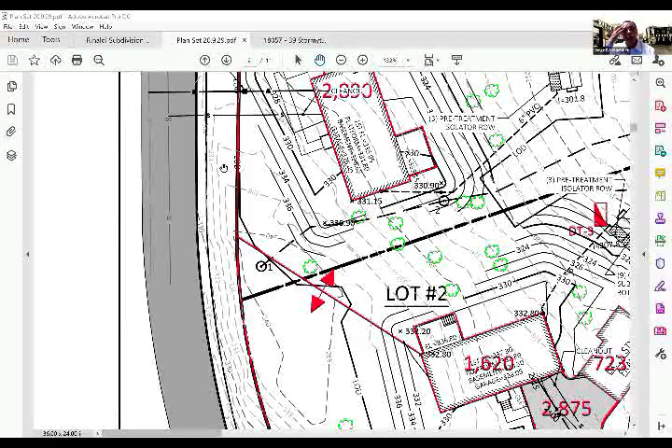Yeah, okay. So this is where we're talking about our concern in installing a sidewalk along Stormytown. Can you see my cursor along here? Yes. Okay, so we have an elevation change—about 340 elevation at the right-of-way here, and then we go down to elevation 328. This is all within the right-of-way of the road of Stormytown.

So putting this sidewalk in and keeping it a safe distance back, we'd be taking this slope down approximately 12 feet. Logistically, number one, closing down Stormytown, but just that mass of earth moved to put in the 4-foot sidewalk would be a large undertaking.

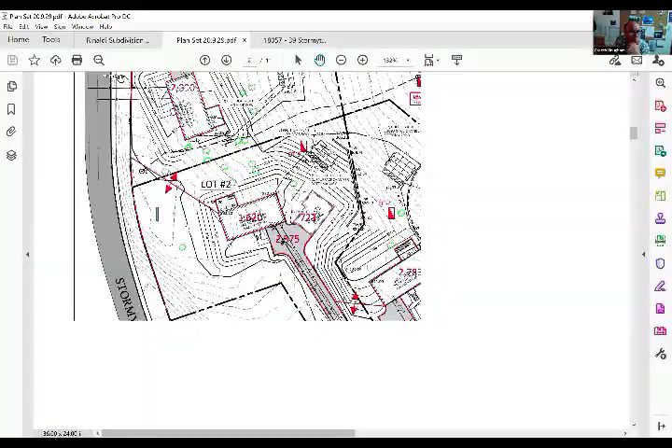I'm not sure if I have enough of the screen shared to show that grading change. Yeah, it's pretty clear—I see that it's a lot of material. The rest of it is okay because we're pretty flat along Stormytown here, and as we get up towards the stop sign it gets flat. But we've got this knoll here that is significant—it's a 12-foot grade change.

To cut it back, we'd be really hampering lot 1, reducing that usable yard. Lot 2's got some room here since we're coming off the new cul-de-sac, but forgetting lot geometry, my concern when we really studied this is that significant cut for the benefit of that 4-foot sidewalk—that's why I came full circle.

So if it's rock as opposed to soil, you could end up with a sheer wall of almost 10 feet in places, right? Yeah, we could—it would be a sheer, there would be some cant to it, but it would be. We wouldn't have to go into the lots, I guess, to get that slope cut back.

Right, yep. I wouldn't give up on it if it's not a tremendous financial burden. Could you use that blasted material anywhere? Well, I don't think the owner would, but I don't think we'd propose to blast given the proximity of existing houses nearby. Oh, okay, just chop it away. Yeah, it would be chipped away, and given the width of Stormytown Road, you wouldn't be able to do that from the top with proper protection along that shoulder.

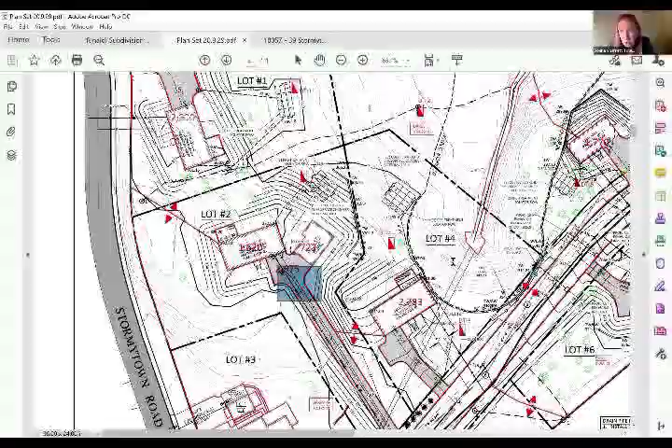I like that idea, can we explore that if it was less work and less impact? Just to see if it would be less impact for earth removal. Because my concern is, with all that removal, if it wasn't all rock and it was earth, you might have to build a wall or some kind of supporting material. Right now it's unknown, but if there was a way to do a crosswalk and go to the other side, that'd be great because that would still achieve the goal.

Yeah, I'd be happy to talk with the owners and also look at that geometry and see what that would be, if that's an option.

Might I also suggest that we get an opinion from the town as to what side of Stormytown Road they would best see fit to have sidewalks installed? Maybe from the town highway supervisor, just to get their thoughts on the matter. I think that's a good idea, Valerie.

Okay, Don, you wanted to say something? The owner wanted to say something? I don't know if it's possible to unmute Donna Chick. Can anybody hear me? I can hear you.

Okay, what are the options for having a more narrow sidewalk? Would that help alleviate some of your issues in terms of that particular location, other than putting the sidewalk on the opposite side of the road? Yeah, no, because the slope starts basically within a couple of feet of the edge of pavement. You can see these contours are really close together and they go right up to the edge of pavement, which is the shaded area.

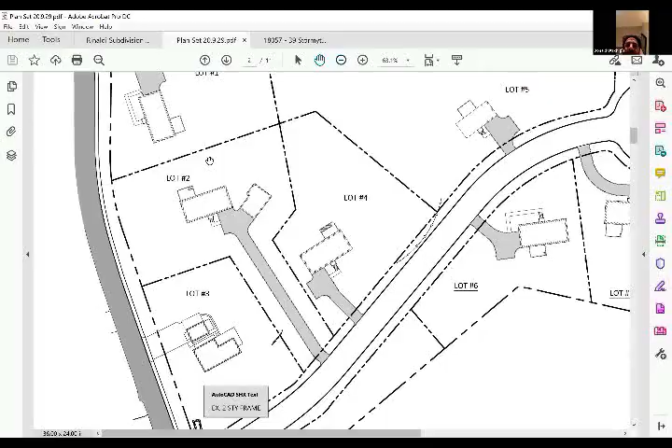Sure. Okay, so I had spoken with Paul with Fusion and JB a little earlier this evening. We're not opposed to putting a sidewalk in. Obviously, if we were going to put a sidewalk in, we would like to put it in the development, in the cul-de-sac, along Stormytown on the side of the cul-de-sac.

If there is rock, which is a good chance it will be, it will take a lot of time. It'll be relatively difficult to protect the traffic and pedestrians outside from hammering rock. We can do it, obviously.

And we also discussed putting it on the other side of the road. One of the concerns is the other side of the road, we would be impacting neighbors on that side by doing that. So we're not against putting a sidewalk in, or the financial cost that it would be.

One of the recommendations I made with Paul and JB is we would rather deposit the cost of that sidewalk, a reasonable cost, to the town of Ossining, so that you guys can continue existing sidewalks somewhere more feasible, which would be more beneficial for current residents of the town along with the town itself. Because right now, if we put a sidewalk that goes nowhere and ends nowhere for an undetermined period of time, but if there's a section of the town that could use it to continue an existing sidewalk or repair a sidewalk that's necessary, as an applicant we don't have a problem depositing the money into the town, the cost to do that sidewalk.

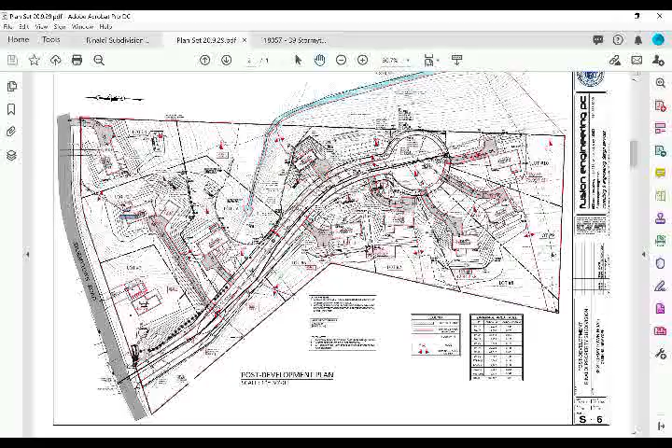That's not a problem, Dan. We can advance that grading—we've looked at that, we're proposing a cantilever retaining wall in that location. In terms of the stone footing and facing, it's a tricky proposition depending on how high the wall is with a footing design like that.

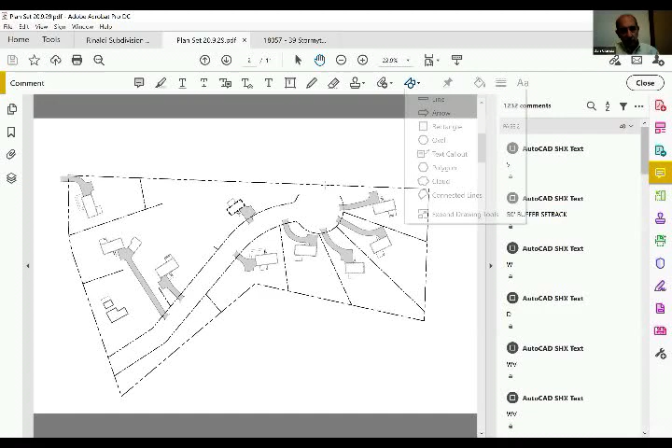Perhaps at the site plan we can just put a note reinforcing that a building permit will be required for that structure. It's going to be in the right of way dedicated to the town, so ultimately we'll be responsible for it. But I just want to make sure we're on the same page with how the grades between the cul-de-sac and retaining wall will be treated.

Yeah, that the plat will also show. Merritt's is preparing the plat for us. We're putting, just as a note, as this gets prepared...

That will also bring us to the application for the water main extension from the health department. We're putting the drainage that's in lot 5 in an easement dedicated to the town. That's dealing with the stormwater from the road, as well as this bioretention basin between the right of way of the cul-de-sac and the drainage. That'll also be within an easement, and it'll be shown on the plat.

And of course, the final location of where the sidewalk goes to. Although if it's off the property, I guess the sidewalk would just be part of the site plan, not part of the plat.

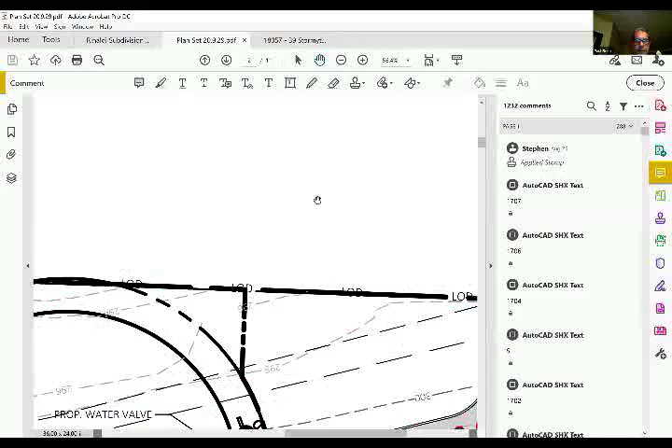But yeah, we can make those notes on the site plan for that retaining wall here too, and we've got the overlay done for the drainage and the slopes. We're kind of limited to where things are going, but I think we've got a solution that can mitigate our runoff to the pre-development rate.

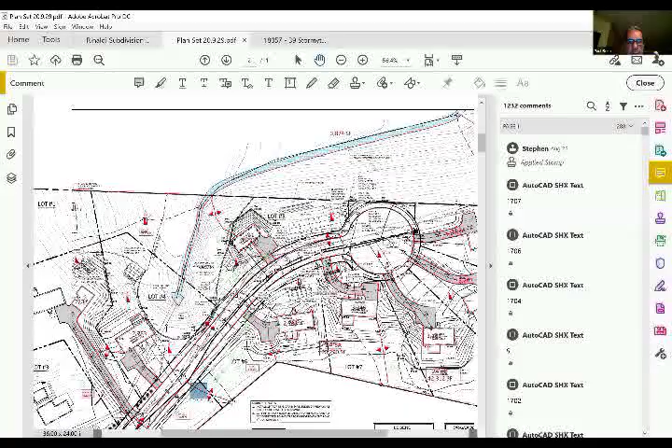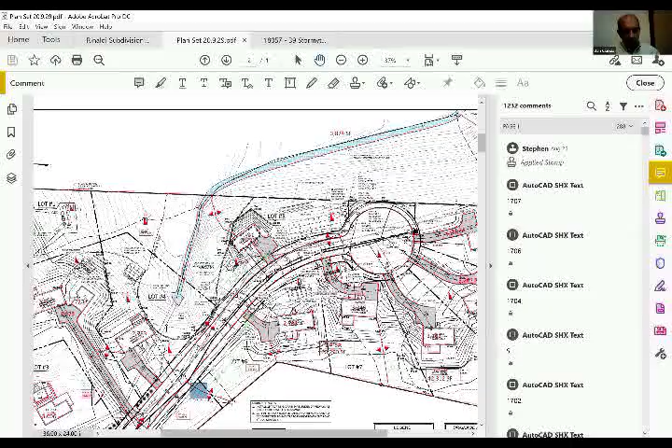All right, and the final note, again, was a coordination issue that the rain garden detail shown on JB's plan looks different than the rain garden shown on the engineering set. So the drawings have to be coordinated, or one drawing governs what it's going to be.

Yeah, well, JB and I will handle that. We'll probably end up merging these into one set. All right, so we've got to do a final review of the latest things, but if something else is forthcoming - this quick scan, I saw a couple other things on the plans we got today that need to be adjusted. So I'll be in touch with you on that.

Yeah, thanks, Dan. Hey, it sounds like the applicant's got a lot of work to do ahead with this. Are there members of the public present for this matter?

Yes. Who wish to speak? No.

I have some comments too, so maybe after. Yeah, I just wanted to make sure that the public hasn't run off on us. Yeah, no, they haven't. Okay.

So, board members, any comments at this time? Donna? Yeah, I have a few. So first, I don't think I ever said, but I definitely would - I'm definitely in favor of waiving the streetlights. So I just wanted to make that official. And I look forward to the further discussion of the sidewalk.

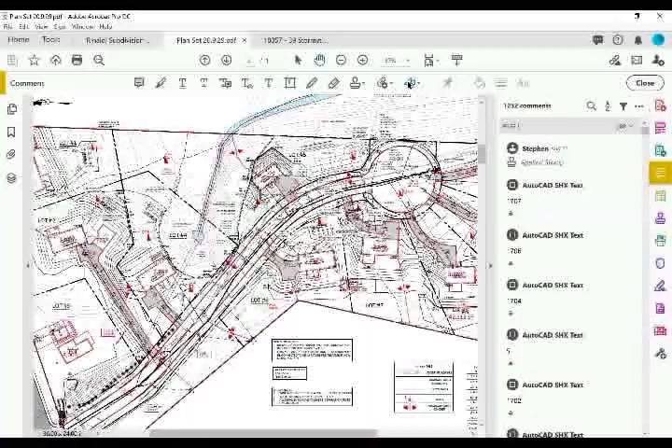So I had brought up last time my concern about the road being right next to such steep slopes. I was wondering, I had asked for the stone wall to be extended and another one added. If that doesn't look like it's been addressed, I was wondering if this could be referred to Pete Connolly and the Highway Department Supervisor, and Paul Ferroli or whoever would be looking at road situations, because I think there's going to have to be a guardrail or something. You can't just have a road right next to a cliff. Maybe John Hamilton too, I don't know, but I'd definitely want them or someone to look at that as a safety issue, because one icy night with a driver going off the road down that cliff would be really bad. I don't see that - did they add a guardrail there?

Is that what that red line is? Yeah, I was just highlighting this location - I think that's where we were talking about last meeting. We noted that here. Okay, so are you going to put a guardrail or a wall or what? We were proposing a guide rail. Okay, and then also continuing around the cul-de-sac? So would that be - I see you have a guardrail, would you just continue that around? It just seems like it needs to be a lot longer than it is.

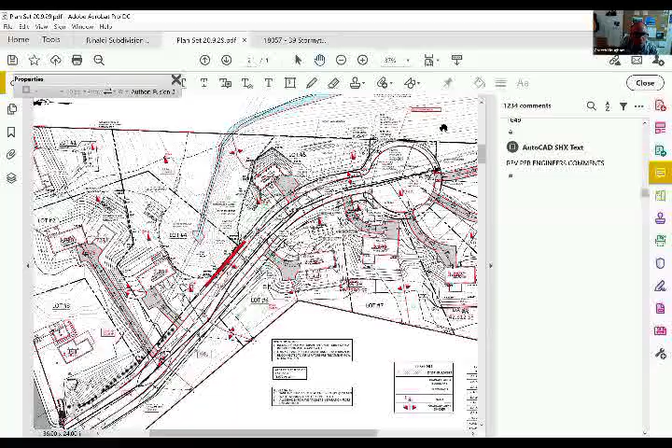So whatever, I don't know if there's any... we would just propose a natural stone, but we didn't, JB. I'm hopeful not talking for you, but I don't think we proposed any samples yet. Just to remind you, very early in the process, you agreed to make it natural stone, not any artificial stone material.

Yeah, so thank you, Gary. I wanted to mention that during the preliminary presentation, we did show, I can bring that back, we did show the board type of stone that was agreed upon. Okay, we knew that. That was probably before I was here, so that's why I didn't know.

Yeah, okay. So I have two other things. One is that I don't know why I didn't notice it before, but you have 300 feet of the stream culverted on the property, and then you're putting a rain garden right next to where there's a culverted stream. So it just seems like, why wouldn't you just daylight the stream instead of building a rain garden right next to a culverted stream? Why wouldn't it just be a daylight of that part of the stream?

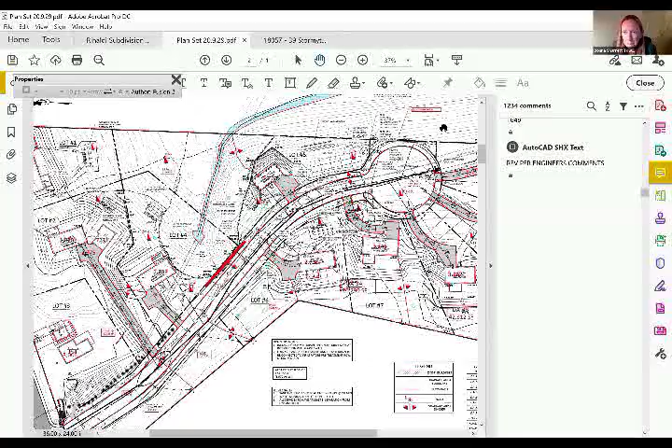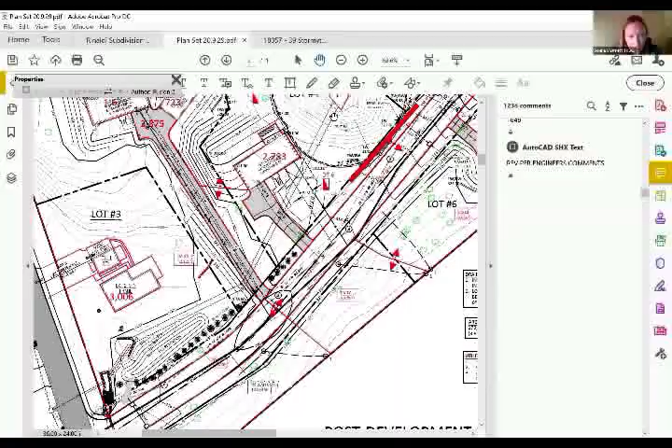Yeah, the whole line, the whole line at the ends, it goes all the way down. It's quite a... I'm just surprised anybody ever did that, that they put the culvert all the way down that slope. Yeah, that's all. This is the culvert that you're talking about. Right, and it daylights over here. Yeah, yep, it's like 300 feet.

So do you have any idea why that was done, that they put the culvert all the way down that slope? I just think, but my bigger point, I'm just baffled by the whole thing, but then putting a rain garden right next to a culverted stream, which the stream would naturally do what a rain garden does, right? Am I missing something? I don't know, maybe I'm missing something.

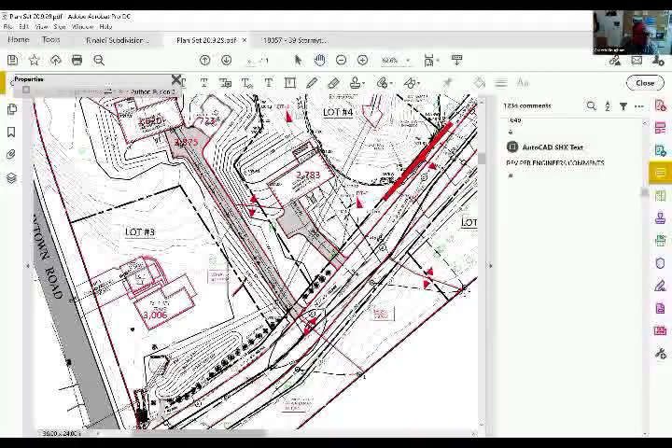No, good point, Donna. We had actually talked about that culverted stream being daylighted very early on, but it got overridden for some reason. I don't quite remember what, but yeah, I agree with Donna's point entirely. It does seem silly to have the bioswale right next to that. They're working at cross purposes almost.

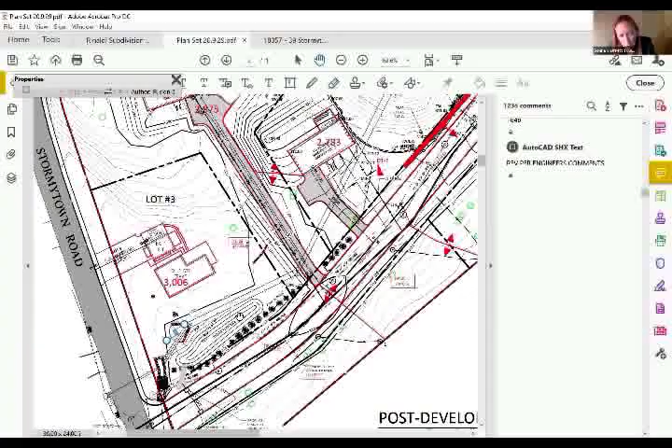So just to clarify though, is the rain garden, what is the intent? What water are you intending to go into the rain garden? Is it that the water that comes out of the culvert by Stormytown Road overflows, or are you looking to guide water from the new roadway that you're building? What are you looking to achieve with the rain garden?

I just messed up the line, but do you see these arrows here? Yes. This is the high point of the cul-de-sac, so the cul-de-sac slopes down from this high point and then comes this way. Right, so we were just treating the water quality portion of this roadway by putting in a bioretention and then letting it discharge directly into this open swale. It was a natural place for the water to collect here in these cul-de-sacs, go into a bioretention facility for water quality, and then discharge it directly to the adjacent stream.

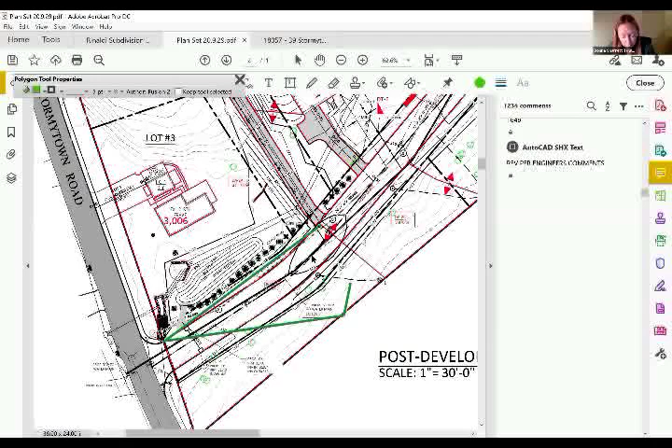Right, right. So, yeah, I'm just so opposed to culverted streams, and I've been to so many places where they've daylighted them. It's a thing that people are doing now because they realize the importance of the stream. To culvert 300 feet of the stream, I would imagine that when that was done, somebody downstream must have experienced some difficulties, because it's a tremendous length of stream to take out of production. So I guess if it's already been discussed, there's nothing I can do about it, but it's really disappointing. Talk about environmental impact, that's got a lot bigger environmental impact than taking out that rock for the sidewalk.

Yeah, absolutely, yeah. I don't know when that was done, but I'm not sure when that happened. But now, with all the equipment, would be the time that you could reverse that wrong. With the equipment that you'll have on the site for doing this project, it would be like the only time that you could reverse the wrong. So even I can see where you'd want to keep it culverted underneath the driveways and in between the two driveways, but I don't understand why it would be culverted going down the slope and here. Yeah.

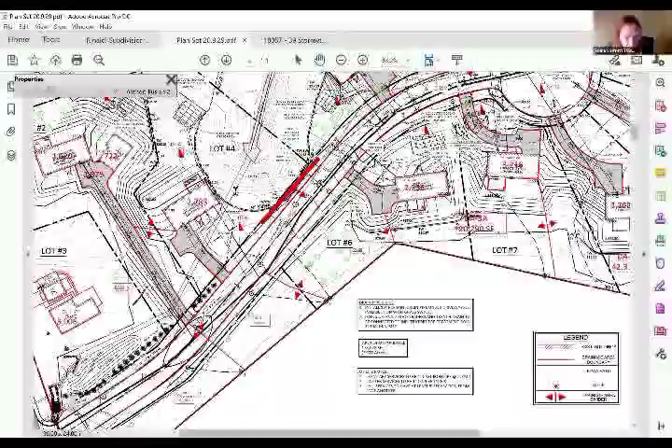It's just so strange that was done. A lot of things in the past have been done that are so crazy, and we're living with all those things. But yeah, you've got a pretty significant slope here. I don't know the reason why it was done, but you've got a pretty significant grade change here from here to where it daylights. But I hear you.

All right, so I'll leave that if anyone else wants to comment. But my last point, I would definitely like to see the plant list for the rain garden. I don't understand why we wouldn't see an actual plant list for that. If you are going to do the rain garden right next to the culverted stream, I would like to see that.

I would have to say I've never heard of a rain garden that didn't take much longer than 2 years to get established, so I would say 5 years would be what it should be. And then you're saying it's going to be an easement. Does that mean it becomes the town's problem for upkeeping it?

It's receiving the discharge, the runoff from the road. So who's going to be maintaining it in theory? The town, right? So that's not happening, just telling you now. They're having a hard time keeping the parks up, limited staff. I don't know how they'll ever staff that.

So I just don't even see the point of putting a rain garden in. I really don't, because it's just going to be a wasted effort. They're really hard to maintain when someone is maintaining them, and to have it without maintenance is going to be really difficult, and there's just no staff. I don't see flush times ahead for the town, so I don't know how they're going to get more staff to do that.

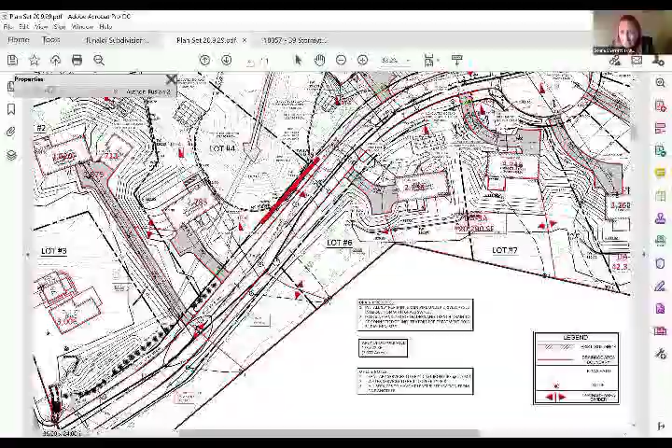We live in an area that still has remnants of a deciduous hardwood forest, and developers keep coming in and taking out the deciduous trees and putting in evergreens, and it's dramatically changing the environment. In this case it's not going to look natural. Also, when I looked on GIS, there's already a deciduous canopy of trees down there. I don't know how you would plant evergreens underneath the canopy of a deciduous tree.

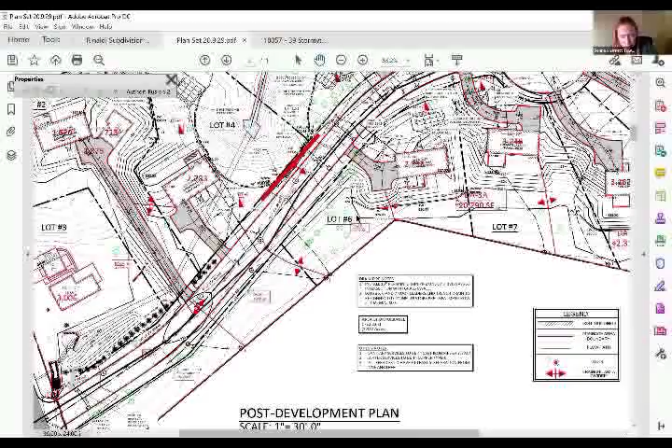So I really object to those evergreens. If you wanted to put a few in, fine, but I counted them up - on this project you're proposing 137 evergreens and 73 deciduous trees. Before, with the pre-existing conditions, the only evergreens were that line of pines someone planted. The trees should be deciduous - this doesn't look natural.

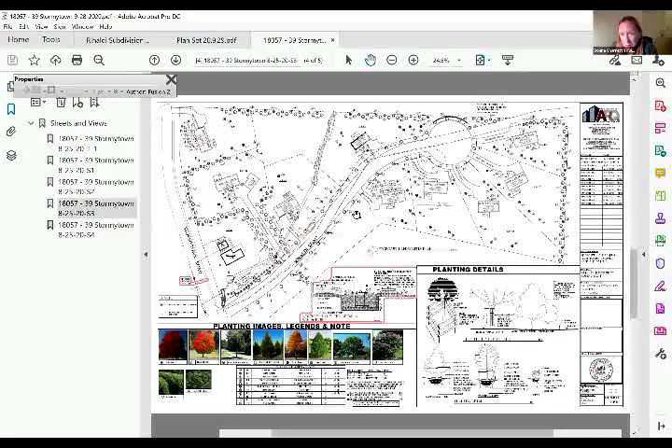Also the trees along Rinaldi Road, you have red cedars - every 30 to 40 feet, a red cedar. It would be far more attractive to have a deciduous tree-lined street. This is what our community looks like. So I would ask if you would consider changing that and maybe diversifying the list a little more so there's not so many of one specific type of tree.

Also, I think Valerie mentioned in her memo something about street trees. It'd be really good to have trees along the road, along the Stormytown Road side - I think that would be more attractive than having just lawns. So, if you could put some of the trees there and not have so many evergreens.

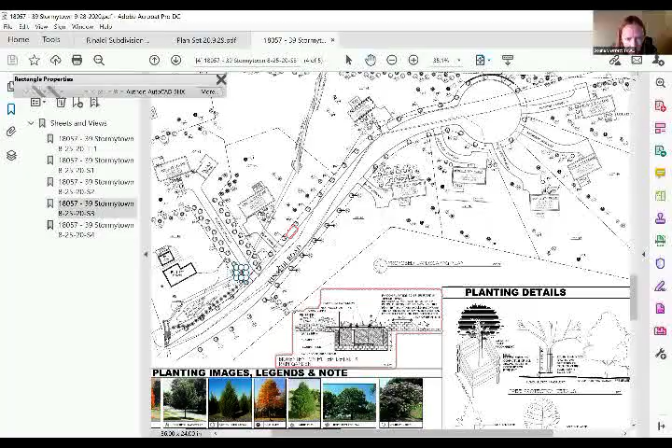And finally, what I brought up last time - I don't understand how the trees are going to be planted on an extremely steep slope. My understanding is you're going to put 4-inch diameter caliper trees. I don't know how you would plant those on an extremely steep slope or water them afterwards, and I didn't get any answers to that.

So I would prefer that the trees be staggered rather than wall-like in a line, and put in flatter portions of the slope where it flattens out a little bit, where the lines aren't so close together. Because unless you can tell me how you're going to put those giant roots into the side of a cliff, I don't know how you're going to do it.

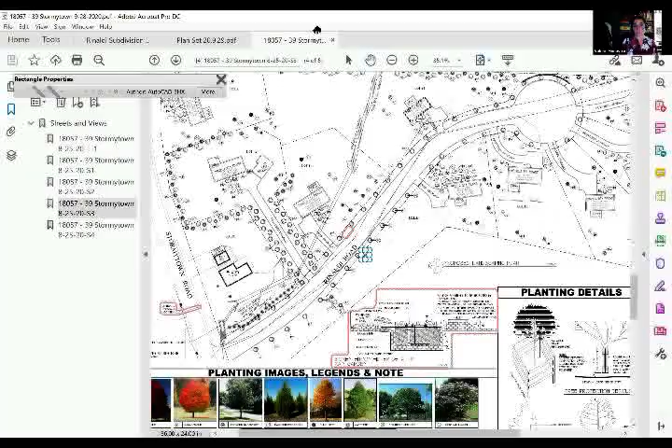Mr. Chairman, these are all really great comments, Donna, and we should definitely look into these. This applicant will be back next planning board meeting, but there is a public hearing tonight. We have three public hearings tonight, so maybe we can take the board's comments at the end, since some members of the public are here to speak on this application. If it's all right with you, Mr. Chairman, maybe we can open that public hearing and go back to the board members afterwards.

I believe Mr. Taliano wanted to speak. Yes, thank you very much.

The club, as you know, is adjacent to the proposed development. Our primary concern is the runoff from that stream - we call it a stream, but sometimes it's a river. We have fields and tennis courts, and on the west side of the tennis courts is that stream, which originates, I guess, up on Stormytown Road. I'm not sure exactly where it starts, but it runs along the west side of our parking lot, fields, and tennis courts.

There are times where this is a raging river, and we are very concerned about washing out our fields and tennis courts. So we just want to be on record voicing our opinion about that, and to ask if we can get a better explanation of how that stream is going to be handled from the end of our property.

Does the applicant want to respond at this time? Yeah, the stormwater has been designed and we're required to mitigate the additional runoff caused by the development, which includes the removal of trees. The design anticipates what the runoff is in the existing condition, which has a certain cover type, and the proposed condition - that's how we model the stormwater system, so the end product doesn't release water at a rate more than what's in the pre-existing condition. So in terms of whatever the stream is doing now, we're compelled to design this and provide enough storage on site so that we're not adding to or creating more water in that stream during a flooding condition or any storm event.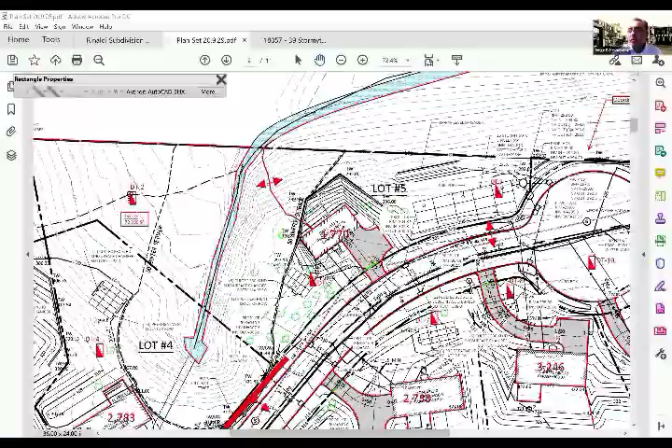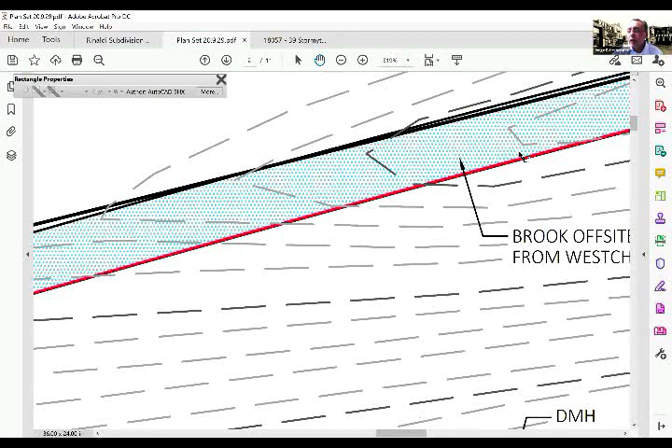I think Paul is sharing the screen. You're looking at landscaping, and there's a wooded area on your side as well. So you'll be looking at a small portion of retaining wall and then landscaping along the wall, along the property. We're not clearing that much of that area along the property line.

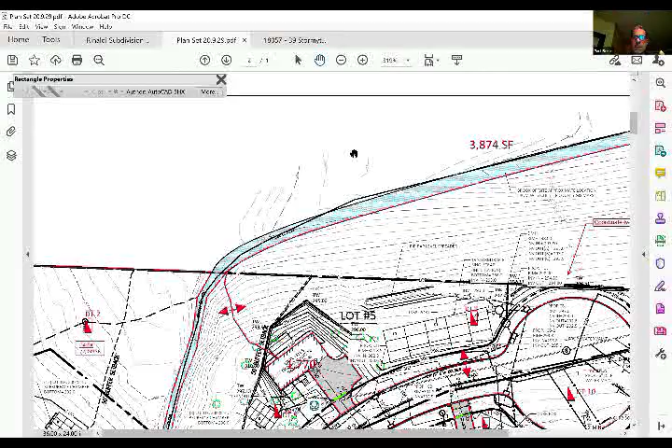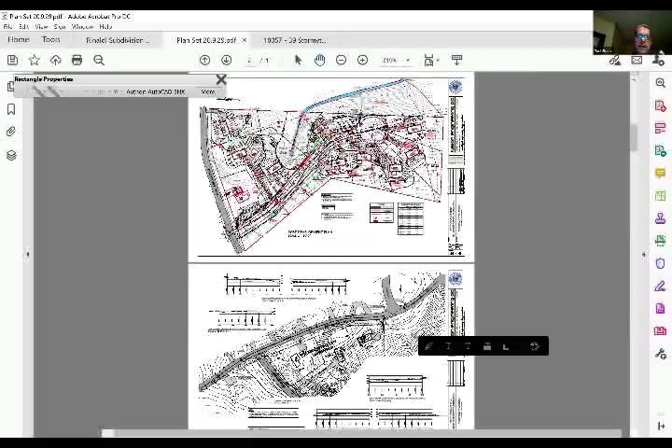Okay, so this is elevation 250 in here, and our cul-de-sac is at elevation 290, I believe. I'm sorry, it's just really slow. But you've got over a 40-foot elevation change from one side to the other. So even, you know, you're not going to see...

Yeah, this is elevation 300. So you've got over a 50-foot elevation change between the two properties at the property line. So you're looking at an existing slope that's not being touched. I haven't done a cross section, but I don't think you're going to see much. I agree, so even the evergreens along the property line, you're not going to see. The retaining wall that we're putting stone in front of for the benefit of Tourview, you're not going to see. But that's what we're proposing.

But your property will be 50 feet higher than our property, so you'll be looking down into our property, basically. Correct. Yeah, okay.

Applicant, we expect to see another submission from you on this, obviously. Yep, and we'll have the plat, which I know is the long-awaited next step. All the other details will kind of be incorporated in that as well, with a new site plan and coordinated drawings between JV and I. Okay, great. Please submit it and give the staff enough time to review it beforehand. Okay, thank you, have a good night.

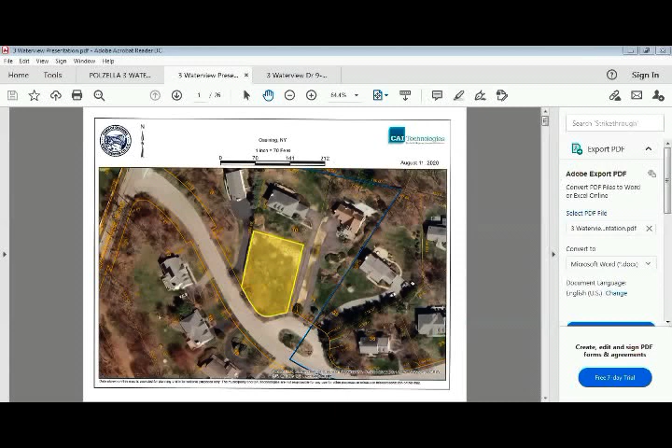I don't know whether it's something we'd have to look at the traffic more carefully for, to see whether any particular mirrors or anything would be adding. But wouldn't that be a matter for the superintendent to handle?

Has that been a continuing issue with us? Dan? That has been a continuing issue we've raised, but it's never really been addressed. And again, I have no objection to the property. It makes perfect sense, and I actually like where the driveway is going to go. I'm just thinking that with another set of cars coming out of there, it's only going to aggravate the situation. I would love to see the town focus on that corner to make sure we're safe coming out of there, all of us, including the new buyers.

If the applicant would just take a gander at the issue, to see whether it would be easy for anything near his property to have an effect on that matter. Was that for me, Mr. Chairman? I didn't catch that. Yes, let's say that once again, sorry. Perhaps you want to look at seeing whether there's something you could do to enhance the safety of whoever's the new resident at your location. It can be easily handled, just take a look at it.

Yeah, but Ms. Lopez said our driveway is fine, it's more the island that's the problem. That's not something I could address. That's what I'm saying. Okay, is that correct? Any other questions? I do think it's an issue for the town, not so much for Mr. Polzella. I think the town should look at that again with the addition of the new home. I can raise that issue also with Paul Frioli and Connolly, since we're going to reach out to them anyhow for the other application.

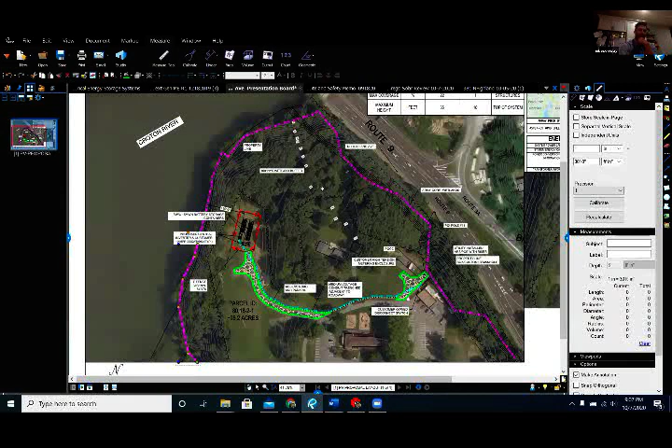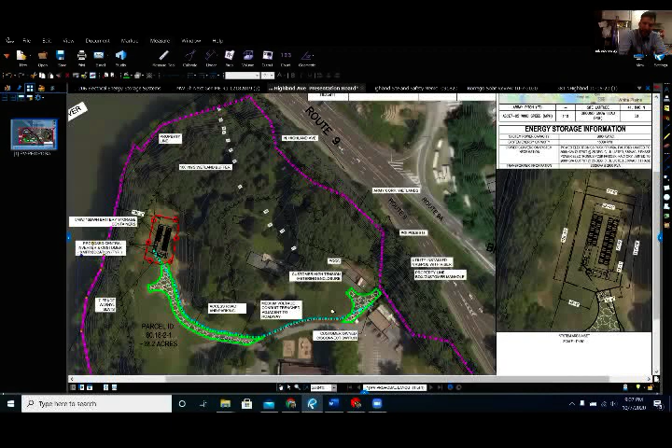I'm from Borrego Solar. We're proposing a battery energy storage system at St. Augustine's Church. The battery energy storage program is a joint effort between Con Edison, the local utility, and the state's energy agencies, most prominently NYSERDA, as part of the Climate Leadership and Community Protection Act (CLCPA), to augment the existing electrical system with a more resilient and carbon-neutral system. This proposed battery system is part and parcel with that plan, one of what we believe will be many systems like it installed across the state. The objective is to reduce stress on Con Ed's system at times of peak demand, which is primarily when the oldest and dirtiest power plants come online. The most immediate objective is to get carbon-neutral resources online to hopefully retire some of the more prominent polluters in the downstate region, particularly with the Indian Point nuclear plant in Peekskill coming offline in the next couple of years.

So what we've got here is about 10,000 square feet, a little bit under a quarter of an acre, in the back of the church, on some vacant land on the northwestern portion of their parcel.

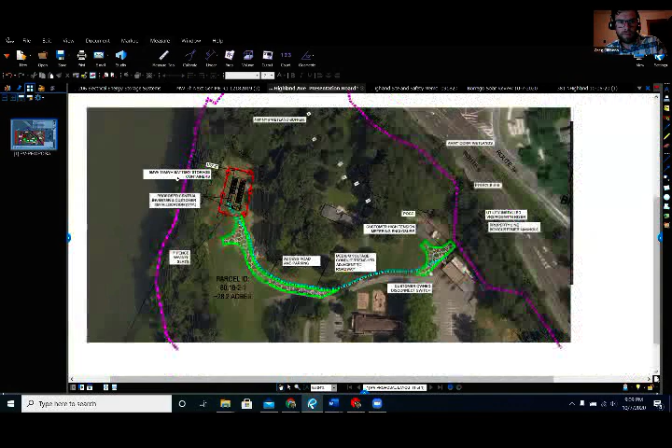The offset to our system is about 100 feet, which was kept per DEC and town requirements. However, there's an elevation change of 60 feet from where our site would be and the river.

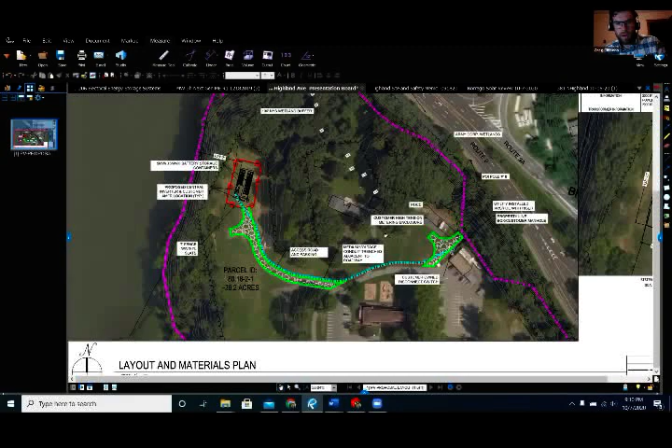The access road will be off of the existing ring road, which runs through the campus. The campus consists of the church, the school, and the rectory, with a ring road running through it. Our access road will be a 20-foot wide gravel access road, capable of handling any of the design loads and vehicles required for it.

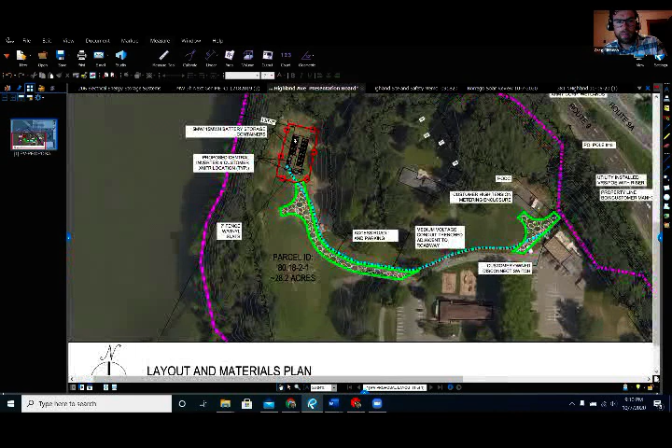There will be a 7-foot fence, denoted in red, surrounding the system. We listed in the plans green slats or vinyl slats, but we can change the color if we need to.

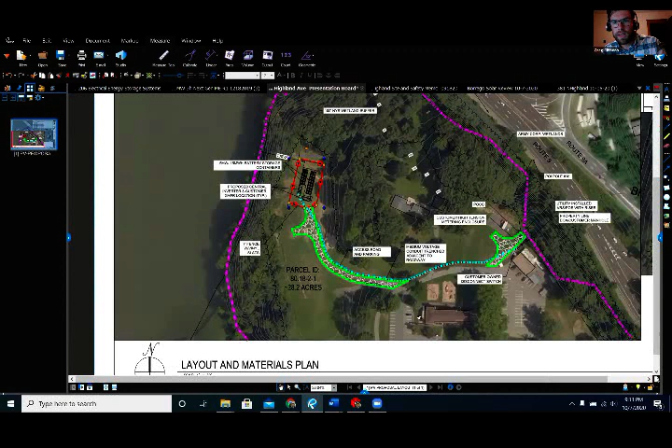The system is very well tucked into the existing site. There won't be any view from any abutters or even from the school, because of the elevation changes and the mature forest around the entire site. You really won't have any visuals even from the St. Augustine's property of the system. I don't think additional landscaping would really help anything—it's really tucked back in.

We aren't actually removing any trees. We're just going on open space that they have that they're not using any longer.

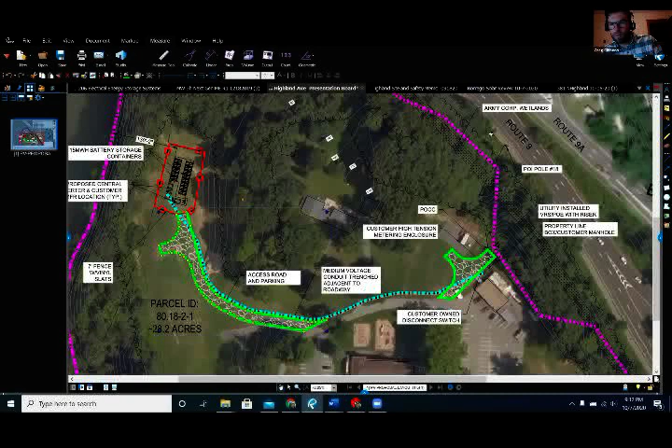There will be a medium voltage trench, denoted in blue, that runs from the system underground along the existing access road, shown in gray, and then over into another stubbed 20-foot wide gravel access road that interconnects right where the entire St. Augustine's property draws power off of the existing route from Route 9. We will also interconnect our power from that location. The system is a grid stack battery storage system.

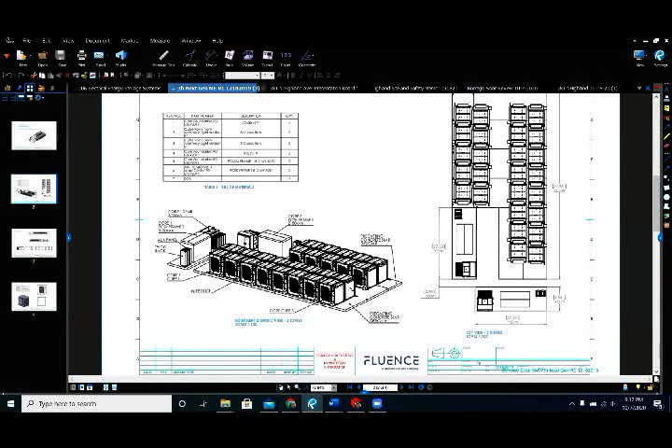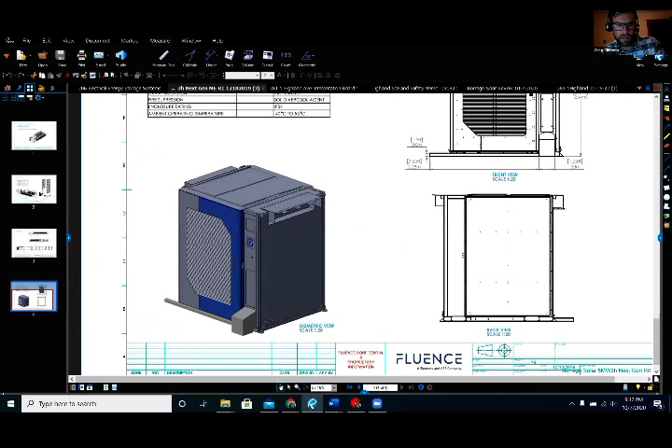I know the planner asked to see some architectural profiles in his review. It's about 8.5 to 9 feet in height, with maybe up to a 1-foot concrete slab foundation. These are individual concrete reinforced steel containers. The batteries are within each container, so each individual battery is separated from another—I'll let Mike talk to that more in a second.

Basically, the system is very well secluded from any outside view or any outside impacts. We do have endangered species on site; however, we should not be impacting any of them. The endangered species is the bald eagle. We won't be clearing any trees, so we shouldn't have any impact to their habitat. The other species identified are all based on the estuary's habitat, which we will not be affecting at all.

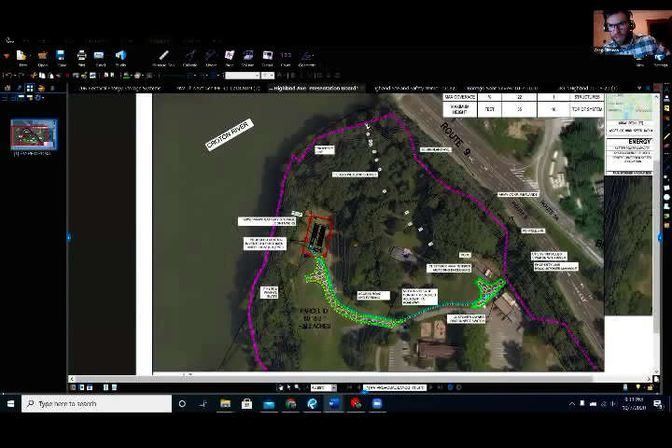There is the wetlands—there are no wetlands identified on site except for the actual river. We do have a spillway that's identified as Army Corps wetlands. However, since this drawing was put together, we have an actual wetland delineation that shows those aren't in fact present there anymore, or they were not delineated as part of our professional delineation.

One other item I'd like to discuss, mentioned by the planner, is a potential variance for the fence. Per the town code, I don't think we should need a variance for a 7-foot fence, even though the town code says 6.5 feet. But that code is specifically referencing fences.

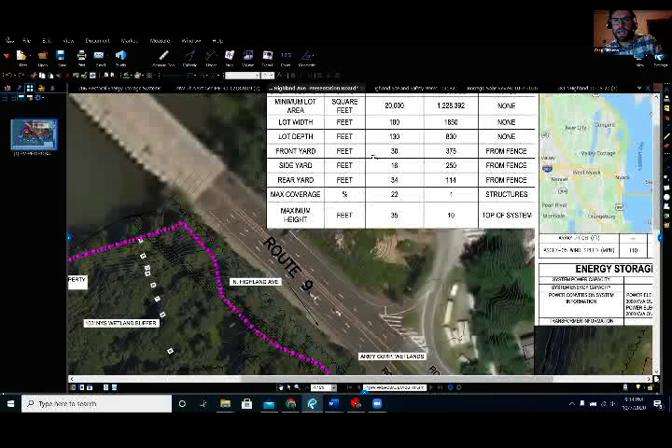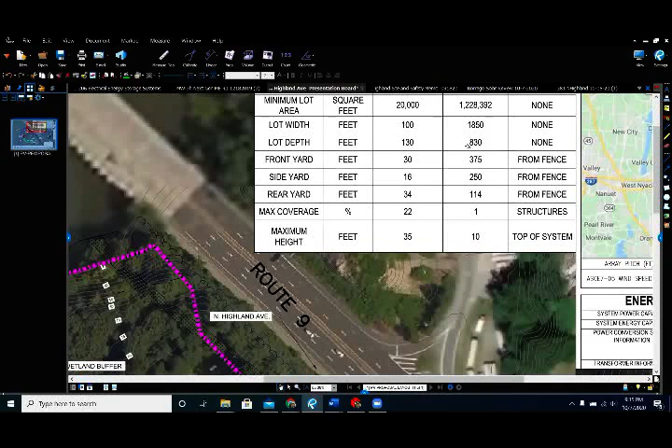Here's the comment: besides a special permit, a height variance of 0.5 feet will be required from the ZBA, since fences or walls over 6.5 feet in height may not be erected in front, rear, or side yards. But per the town code, the front, rear, and side yards specifically apply when adjacent to another property, within the front, rear, and side setbacks—in this case 30, 34, and 16 feet. We have substantially more width from our system to any of those yards, so I don't feel a variance should be required for a 7-foot fence when it's very much in the middle of our site.

I'll let Mike talk a little bit more about the technology and safety that's involved, built into this system. Mike, I'll pass it back to you.

Sure, I'll be brief here, as I expect we'll likely be back in front of this group with fire department and/or first responders to discuss system operation and safety in greater detail in the future. But I'll just briefly say that safety is paramount for these systems, both within the industry ecosystem of vendors and integrators, and within our organization, as safety is a core tenet of our organizational goals. With lithium-ion batteries, safety is extremely important.

These systems are quite sophisticated, and we're continuously monitoring thousands of data points on each battery cell, from operating temperature to voltage, current, and resistance, with high and low set points for each, as well as ambient temperature within their containers, such that parts of the system can be shut down or alarm, with alarms escalated appropriately based on priority.

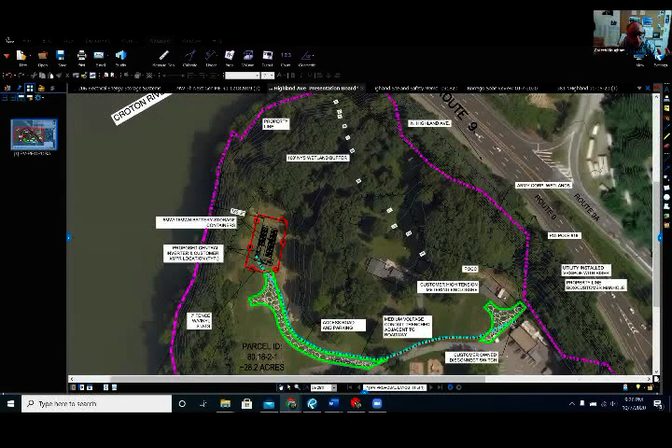I know that area of the Croton River is a nature preserve of some kind. I'm not sure of the details, but it's a natural setting experienced by thousands of canoers and kayakers. So I'm a little concerned about the view of this thing. The 7-foot fence with the green slats can look pretty bad, in all honesty. If there is a view of it, I'd really like to see some very substantial plantings on that west side to block that view. But I think we need to see more to determine whether that is an issue or not.

Secondly, as a point of note, this is right above an area called Frank's Rock, which extends into the river and is a historic site. It's written about in many places—I could show you. Right now it's enjoyed by fishermen and fisherwomen, and I believe they go through this property to get there. That's been a traditional path for those fishing people. I would like to see that not disturbed, if that's possible.

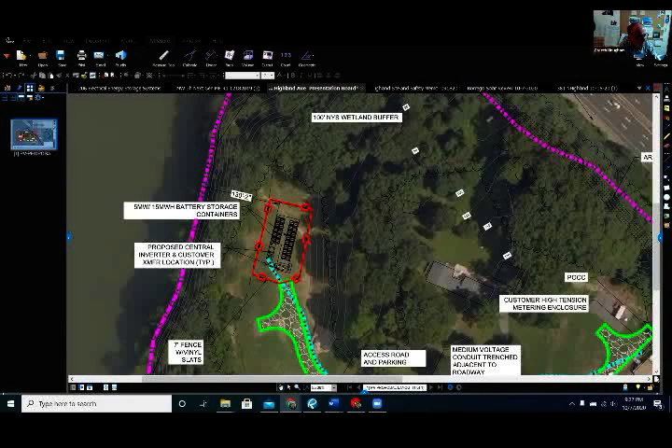And last, I wanted to ask about, there was something, a note I saw that this is a known archaeological area. I know that to be the case. And I wanted to ask when that archaeological survey was going to be done.

Yeah, we have our consultant ready to go. We wanted to just get some initial feedback from the town before we ordered that, but we will start the phase 1B right after this meeting and get that moving.

Great. So I'd like to point out that it should be mentioned in the request to that archaeologist, whoever you hire to do it, that this is adjacent to the so-called Piping Rock area, which was an archaeological site, a very special site where they found stone tools and so forth going back 6,000 years, which is way before most of the Native American civilizations that we normally think of here. So it's a very special site in New York State, Piping Rock, and this is adjacent to it. So I just want to make sure that they are aware of that, so that they can take due consideration of those findings.

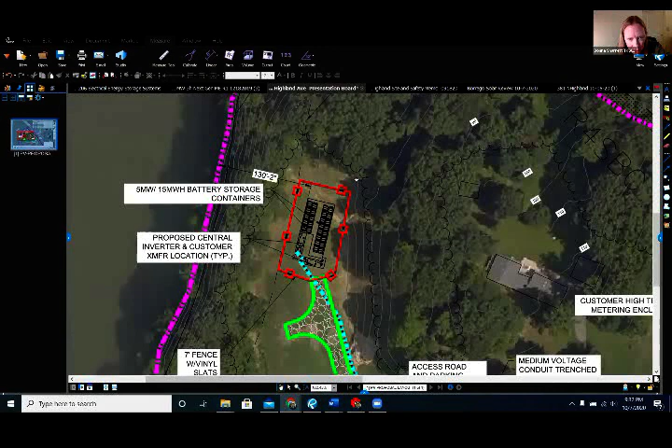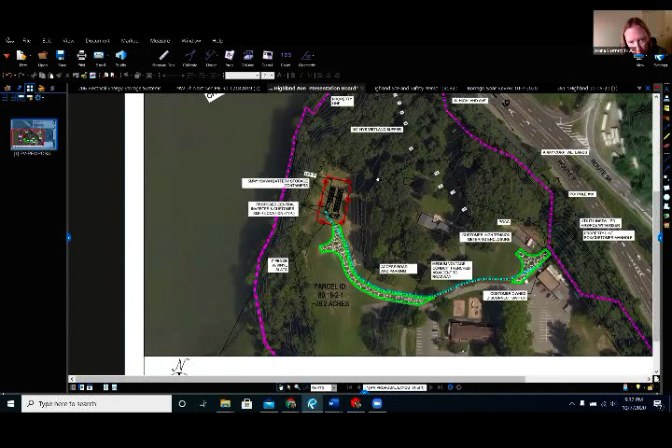Could you put back the thing you had before, where it shows the topography? It shows the topography lines. Yes, yeah, so can you scroll it up so we can see? Bring the image up. Yeah. So it looks to me like where you see parcel ID, where it says 28.2 acres, that the topography there, where you see those inverted V's, indicate that there's a stream at some point, maybe even just ephemeral.

So I was wondering, when you had the soil information, because I was very impressed, all the stuff that you submitted, by the way, all the soil information. Where did you get that information from? Is it just from a general database, or did someone actually go out and do soil samples?

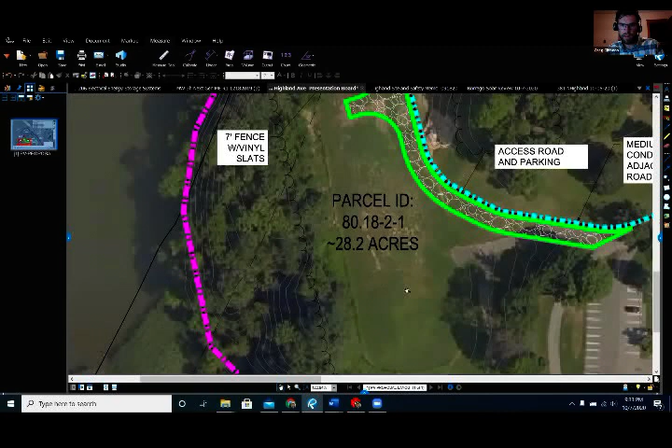Yeah, that would be just from the general GIS soil database. From being on site, I do see what you're showing here, what you're looking at here. It looks like there's probably been some erosion over time where the water that comes off of, this is actually like an old playing field.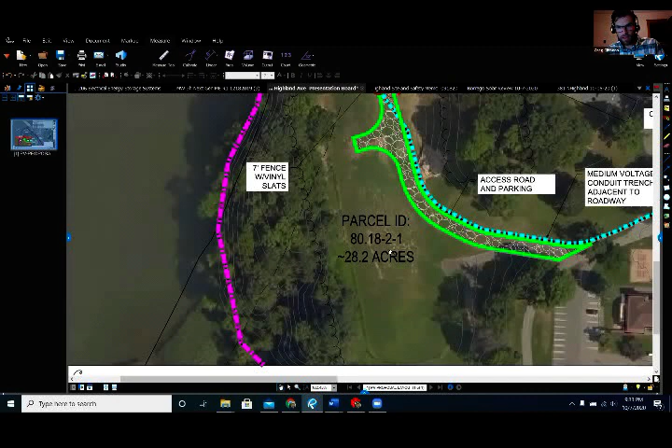So it is very flat, as flat as it shows on the contours here. It seems that water has eroded this portion of the bank away faster than other parts of it. We are in the process of getting a full survey with more detailed topography, so that'll be shown on the next set of plans. There's a big hill on the other side, so it makes sense that the water has to go down somewhere. That's kind of logical.

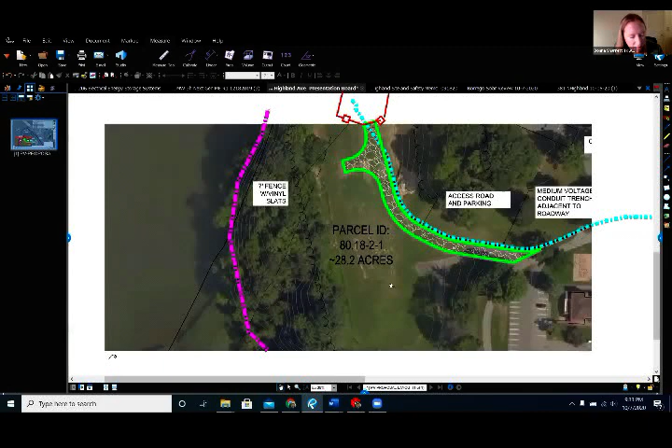So I was wondering, I guess it's a question for Valerie, if we could refer this to the EAC, since there's an issue with a possible stream crossing. It's something that would definitely be handled, but you're putting a road through, so I'd like to know if there's some kind of water crossing at some point, even if it's ephemeral. Can we refer this to the EAC?

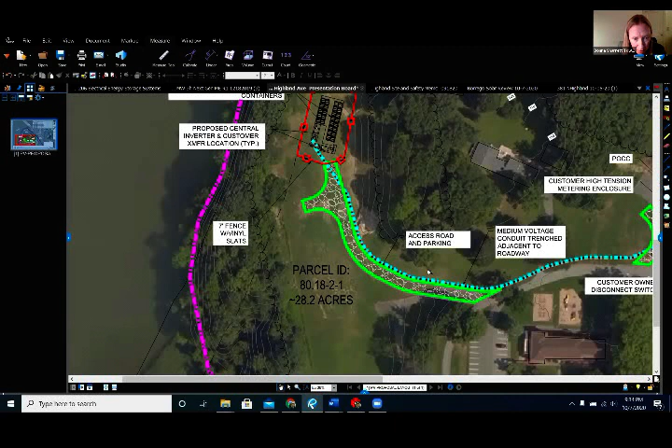Yeah, I'm just looking. There's a stream on the site. It doesn't look like it, but when you look at the topography over by where it says 28.2 acres, if you look down towards the river, there's inverted V's, which is usually a clear indicator that there's water going down, by the river. I don't believe there's a stream on site, but that's up to the board if you want to do a recommendation to the EAC.

Just to have them do a site walk and look at the soil. It's likely that water is coming down the existing road here. You can see that underneath our road, there's inverted V's there as well. This is some existing impervious that comes down, and it probably comes down a bit concentrated during rain events and comes across. But this is, like I said, a playing field.

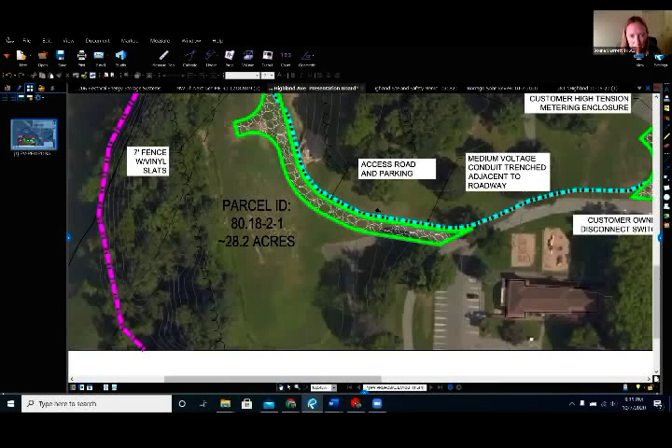There's 100% not any stream or river or anything resembling that on it, because it is level ground. But if water crosses it at some point and you're putting voltage things through, I think it would just be good information to have. The water has to go down somewhere, it's a big slope, so it has to go down somewhere. But Donna, what stream were you thinking might exist if it's a flat playing surface?

Well, it's flat there, and then over by where the church is, there's a big hill. So there is water going somewhere down to the river, and that would indicate that it's there. So at some point, I don't know.

Yeah, we'll provide a much better topography map with our next submission, and we also, as requested by the engineer, will have a SWPPP, which discusses erosion controls and potential stormwater measures required to make sure that nothing else leaves the site than we originally left it before we were proposing this project.

Yeah, my concern is that you'd be crossing through an area that possibly has, during large rain events or something, water coming through there. Which is something certainly you can manage, it's just, I think that should be known.

I'm just asking. Yeah, that's something that we do have a professional wetland delineation report for, and they look for wetlands and streams, they have delineated that, and we will have that confirmed. We've submitted boundary validation and jurisdictional determination to Army Corps and DEC already, and we will have that confirmed with them. Any streams would be identified in that report and confirmed. I'm not saying that we can't do what you're saying, I'm just giving you additional background of what we are going through with this process.

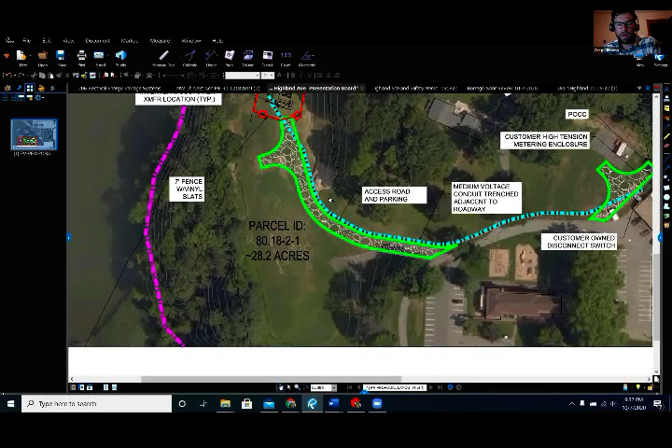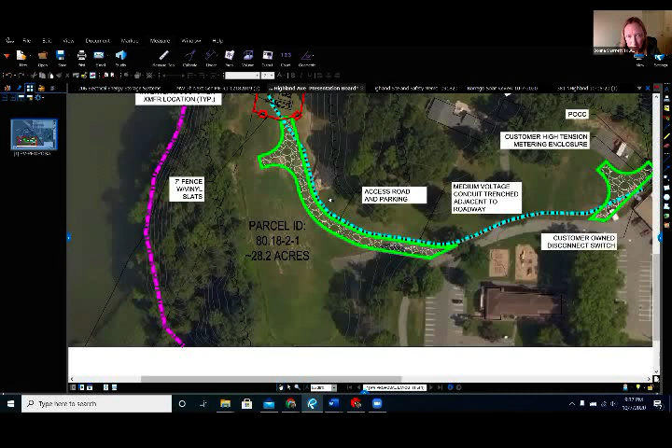So they're actually coming out and surveying? They've done it, yep. I think that delineation was provided with the report with the EAF, I believe. They didn't find anything really on the site, but it's their professional opinion, not our professional opinion. So we do have that included, and then we will get it confirmed with Army Corps and DEC.

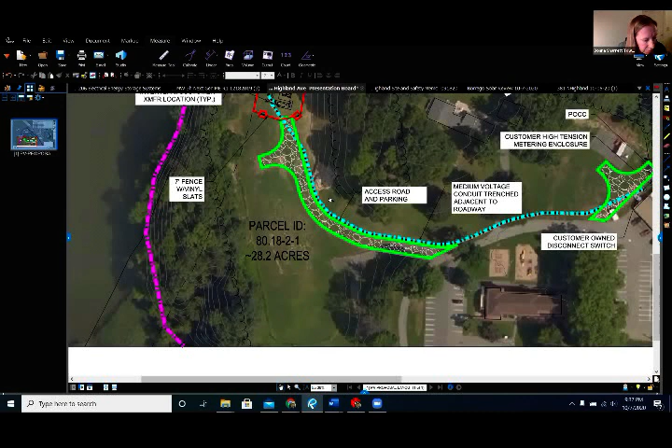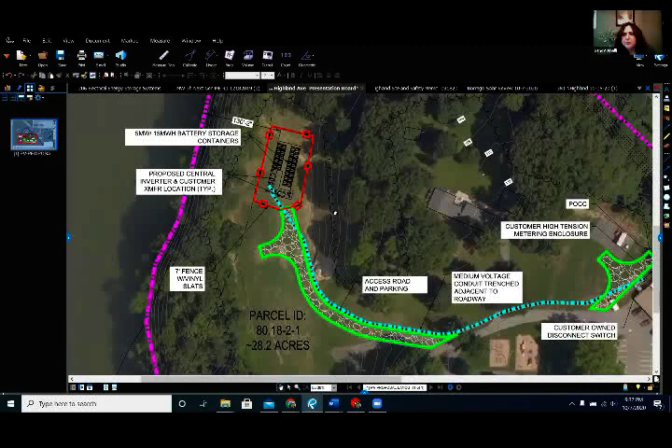Okay, so I would prefer that the EAC looks at it, just because it's the environmental group in the town. But if nobody else wants it, then that's the way it is. I just want to interrupt - Valerie's power went out briefly, so she's trying to sign back on.

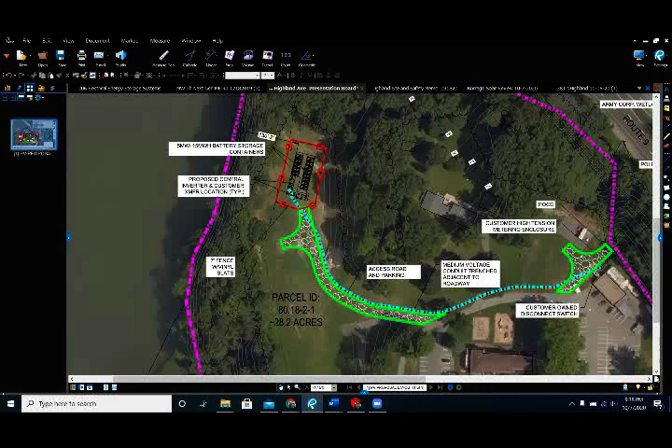Okay, here she is. Mr. Chair, I just don't want you to forget to declare notice of intent to be lead agency and to direct circulation. Right. Yes, why don't we have a motion to that effect? I'll make that motion. Any second?

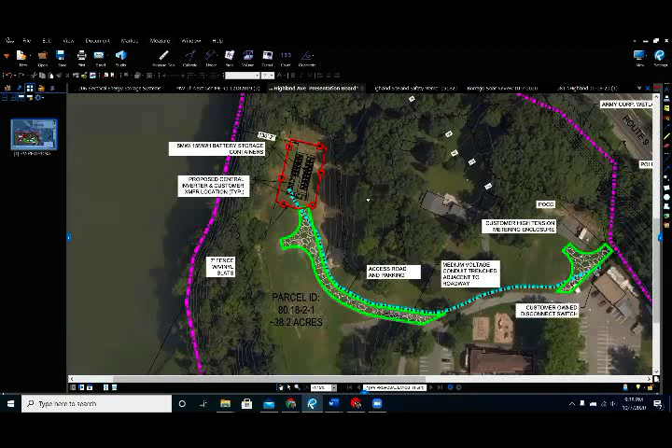I second. Great, okay. Garrett, how do you vote? Aye. All right, I agree as well. Jim? Yes. Donna? Yes. Okay, that would be a majority.

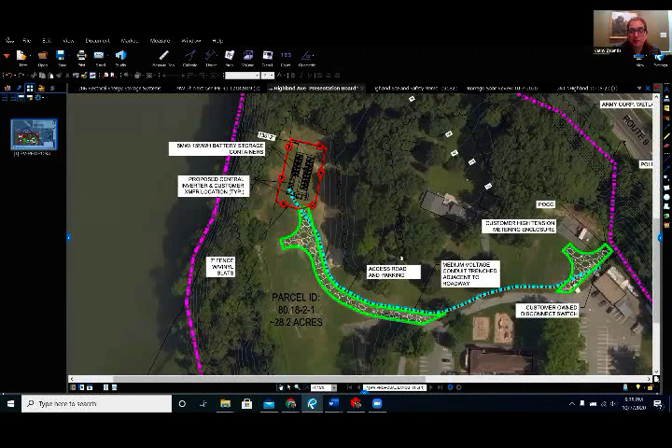What else do we have to do, Kathy? I think there has to be another submission, so I would ask the applicant how long they think they need. We will respond to the comments provided by the planner and the engineer with the appropriate documentation. I believe we're waiting on our final survey, so whenever we get that back, we'll turn around a more substantial set of plans with more details. How long? Hopefully by next month we could turn something around.

So do you think, guys, meeting bi-weekly, we should be shooting for the November 4th meeting rather than the October 21st? That's probably not enough time. Yeah, October 21st isn't going to be enough time, but November 4th sounds doable. Okay.

Do we need to specifically schedule them for November 4th, or could we just wait for the submission? Valerie? I believe we will wait for the submission, and if they submit 10 days ahead of time, then they'll be on the November 4th agenda. If not, it'll go on to the next submission.

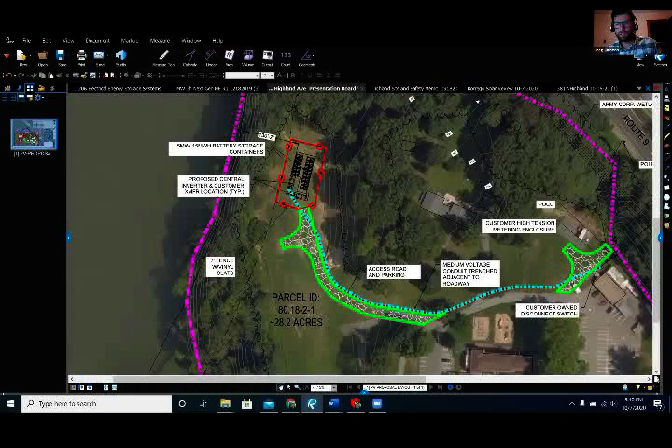Okay, so nothing else has to be done on this matter tonight? No. Okay, well, thank you for your attendance, we'll look forward to your submissions. Great, thank you so much. Okay, appreciate your time. And so we had another request from MGM Design for another extension.

What do we have to do with this? I would just, if you think it's appropriate, grant them a 90-day extension. Okay, is there any objection to this? Is 90 days enough? Yeah. They could always ask for another one. Okay, yeah, that's what seems to be happening.

So, all right, can I have a motion to that effect? I'll make the motion. Garrett? Giving an extension? I'm sorry, what did you say? Giving them an extension, MGM Design? Yes, I agree. Okay, wait a minute, I need a second. Oh, second, I thought Garrett did. Okay, Donna?

I wasn't involved in this, should I be voting on this? They're just asking for an extension. All right, so I say yes. Okay, I agree as well, so we'll inform the applicant of us granting the extension.